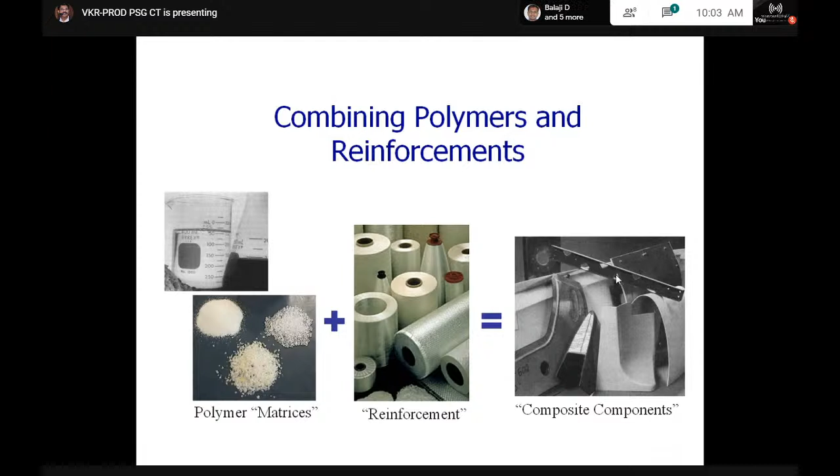To give an introduction about composites: it is combining polymers and reinforcements in a proper way to produce components for our use. There are many composites. If you look at them, composites are classified into polymer matrix composites, metal matrix composites, and ceramic matrix composites. Under polymer matrix composites, we have a lot of applications, ranging from aircraft components to wind turbine blades, fiber glass boats, and even automobiles.

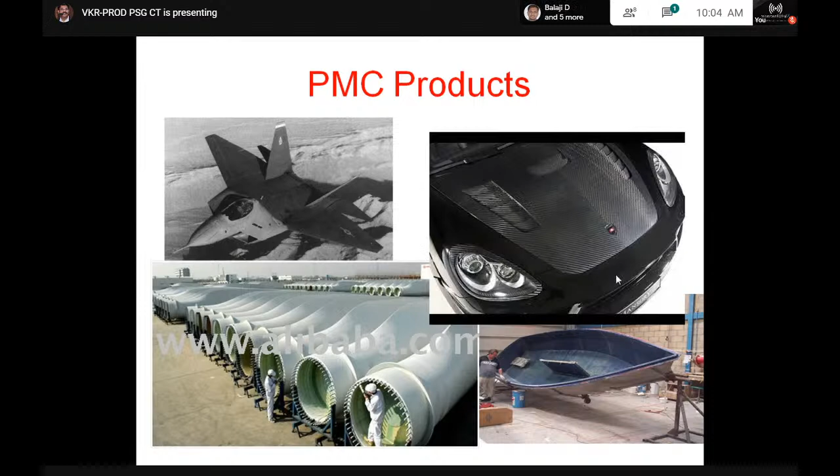Processing of composites is another important aspect to know. One popular process for making composites is the vacuum assisted infusion process, where the fibers are placed on the mold and resin is made to impregnate. Once it impregnates the fiber, we can go for either natural curing or autoclave curing. Most components required for aerospace applications are produced by autoclave curing. This is an autoclave, where the component, once infused, is placed and cured under a controlled atmosphere at high temperature and pressure. Of course, it is expensive.

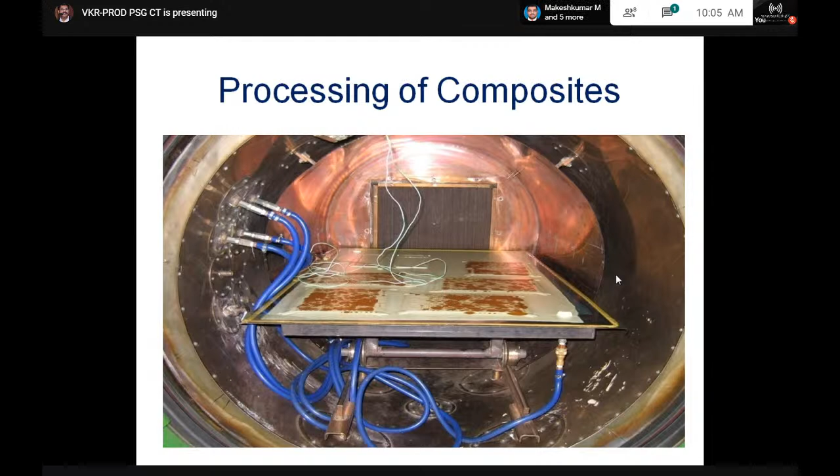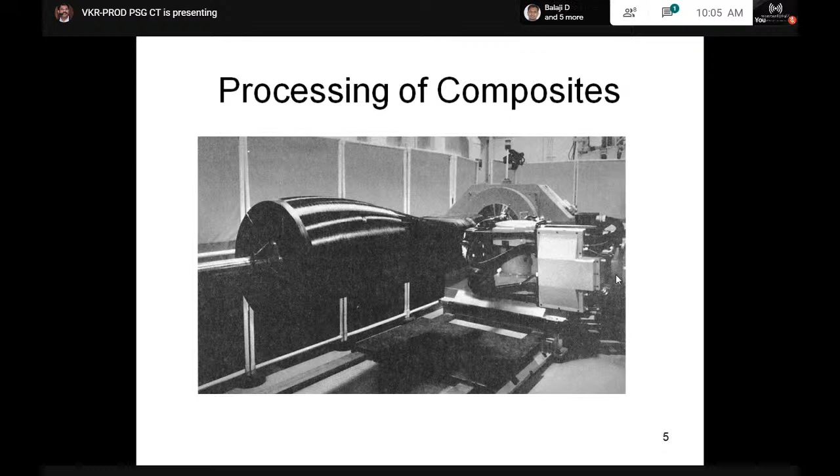You have other processes like filament winding, mainly for rotational parts. You can make tanks, you can make cylinders, where the fiber is made to pass through the resin and you can wind it on a mandrel. Let me show you a glimpse of a video of how cylindrical parts are produced.

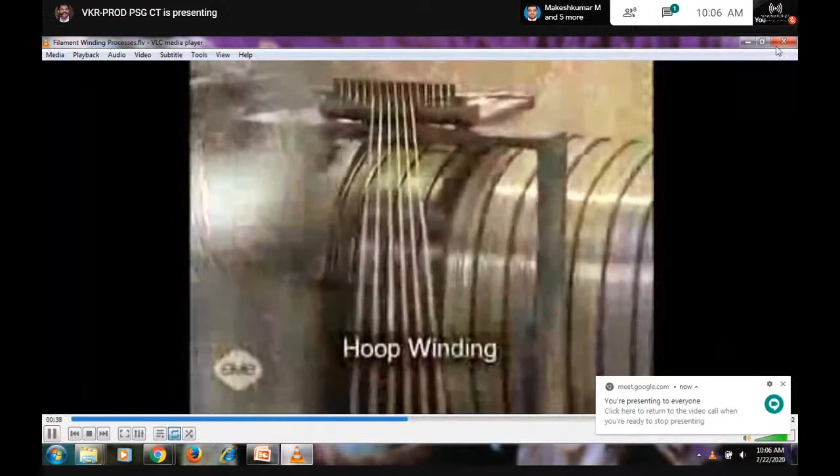This is one of the popular processes for making cylindrical parts. You also have another process generally called spray molding, where the fiber and resin are impregnated by spraying onto the mold. This is another process popularly used for making automotive components. The spray process gives you an idea of how difficult it is.

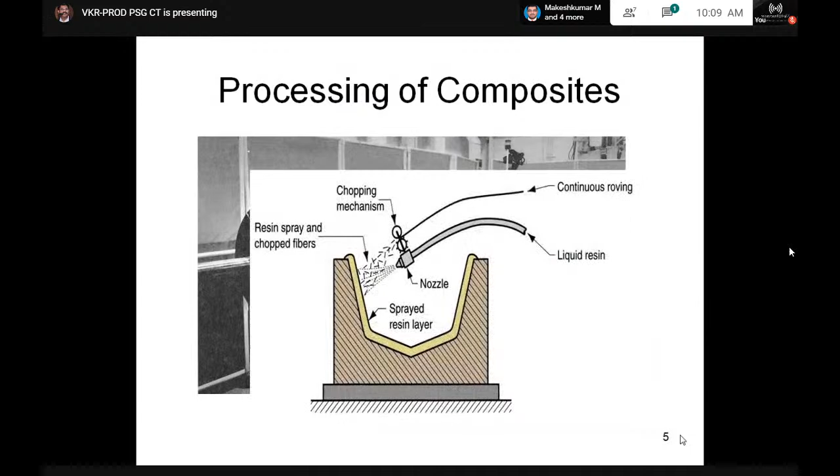If you look at the background and motivation for using composite materials in automobiles, one is auto emission—norms are becoming stringent. The second requirement is fuel economy; it's always good to have better fuel economy in your car. Several solutions exist: one is alternate fuel vehicles, but these are expensive. Improved emission control is another, and reduction in vehicle use—that's what we are practicing now, not traveling, though that may not always be possible. The last option is going for vehicle weight reduction.

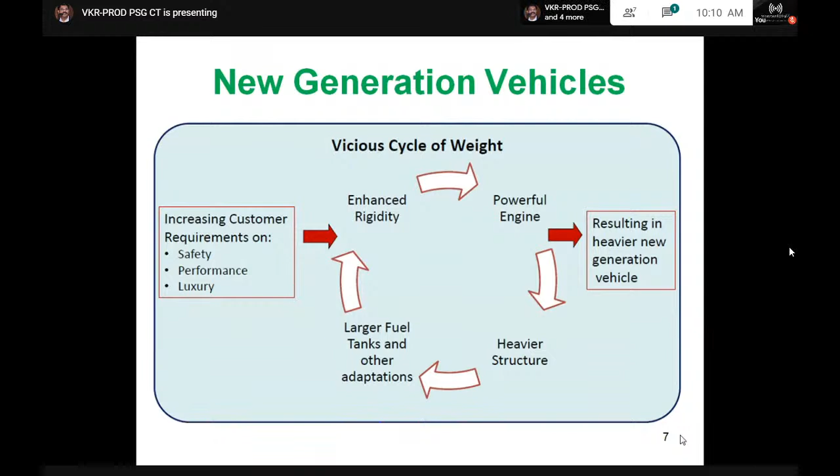If you look at a new generation vehicle, on the left you see increasing customer requirements, mainly on safety, performance, and third, luxury. When you look for safety and performance, you need enhanced rigidity, and everybody requires a powerful engine for performance, which leads to a heavier structure. A heavier structure needs larger fuel tanks and higher fuel capacity, resulting in a heavier new generation vehicle overall. Luxury also adds weight to the vehicle. The need for lightweighting is the order of the day because we always look for enhanced fuel economy. The other important aspect is the environment.

Enhanced payload carrying capacity will be another important aspect to be addressed. You can see a bus in the peak hour, which is designed to carry 50, will sometimes try to accommodate 100. That is a situation in our country.

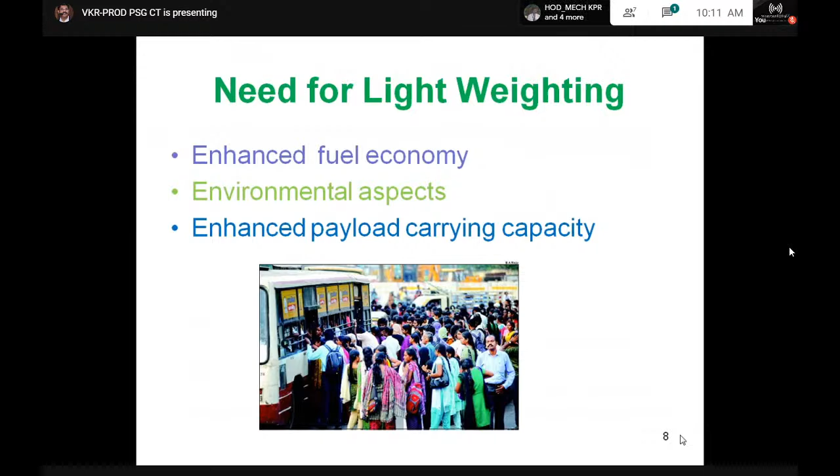If you see the opportunities in lightweighting, one is the lightweight material, and that is the major option. Structural lightweight construction is another option, and the last one is optimizing the production process.

Under lightweight materials, one option may be high strength steels, but they are quite expensive, mostly used in defense and aerospace settings. Aluminum and magnesium is an obvious choice. Then another welcoming member is unreinforced and reinforced plastics.

If you see the optimizing of production processes, we look for light joining techniques and new manufacturing processes.

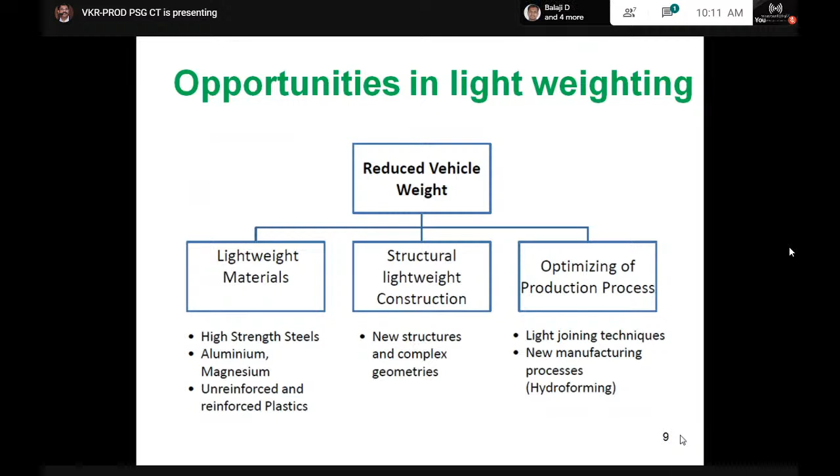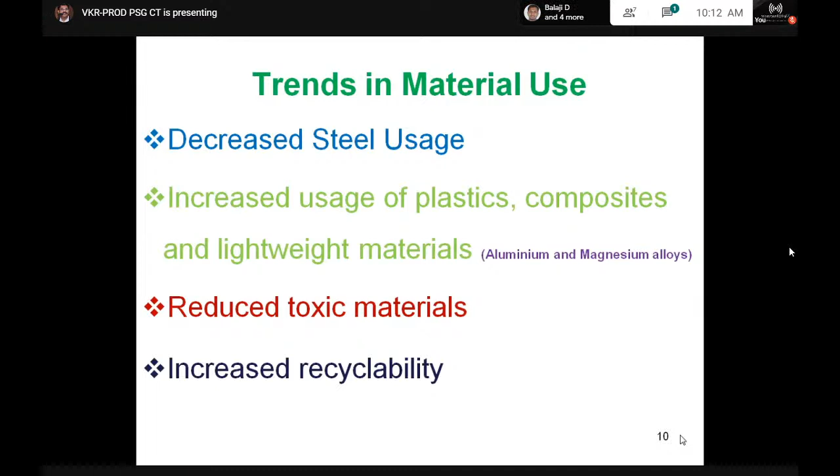The trends in material use are, as I already said, decreased steel usage and increased usage of plastics, composites, and lightweight materials. Aluminum and magnesium alloys are becoming the most preferable choice, and reduced toxic materials, which nobody is accepting. Another important aspect to look at here is increased recyclability.

So people normally look for composite materials, and the trends in composite materials are towards improvement in properties of the fiber. Enhanced properties of the fiber are always the requirement of the industry, whether it is the automotive industry, aerospace industry, or a different segment.

The properties of the resin are always improved. People develop resins for various applications. People look for degradable resin. People also look for resin which can withstand very high temperature, faster and predictable infusion, reduction in number of part counts. You don't need to make a lot of parts and assemble it, and cost reduction in various composites.

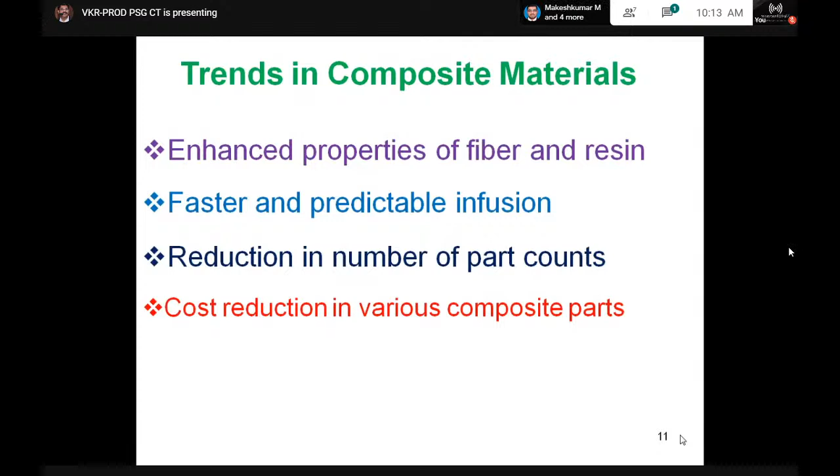With all the trends, if you look at composite materials, especially enhanced properties of fiber and resin, the key driver is weight saving, due to increase in specific strength and stiffness. Of course, performance and safety is another major requirement as far as the automotive industry is concerned.

I don't say it for general application, say a race car. You can see on the left, it is a complete monocoque structure made of carbon fiber, and it is actually joined to a metal chassis. This is actually a project done by one of my students in Western University, and he shared this.

When it looks to safety, you cannot take it lightly. The life of the race car driver is, of course, the life of everybody is important, but it's very, very valuable. You can see the environment in which the race cars are driven, or the speed at which the race cars are driven.

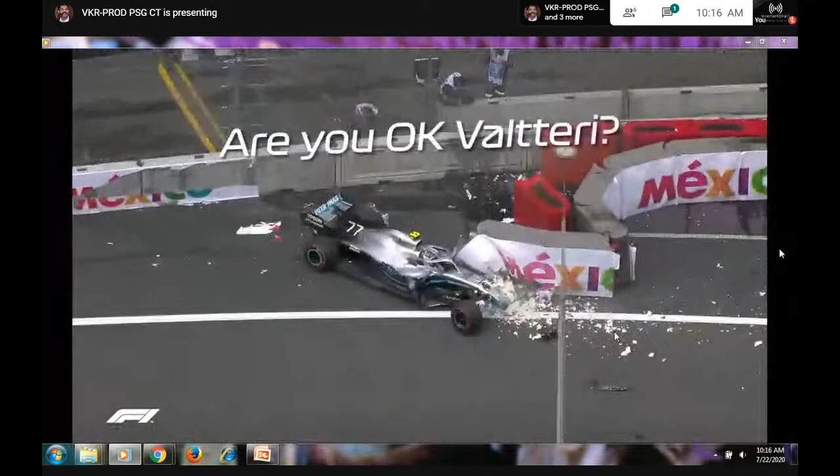You can understand the demanding requirement of a race car. One is performance. Obviously for a race car, performance is key. But more than that, safety plays a major role.

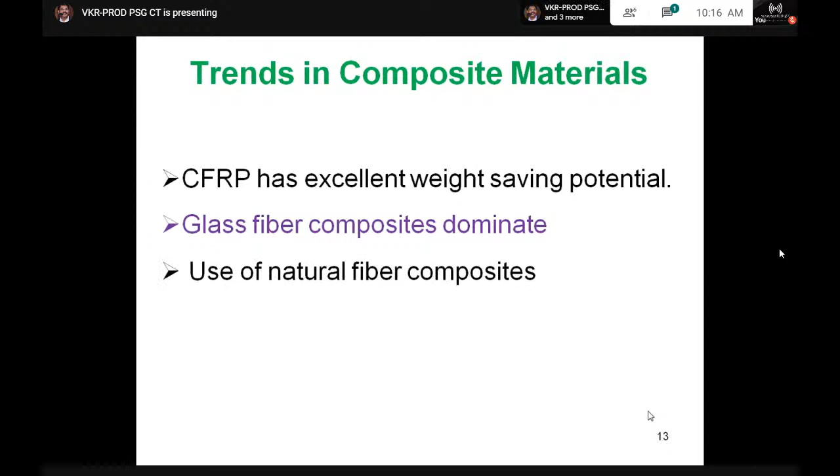CFRP has excellent weight saving potential. Most of the race cars are built by CFRP. Of course, glass fiber composites dominate in the automotive industries too. Another trend is use of natural fiber composites. We have a lot of scope in that.

Issues in composite materials: little has been done to reduce the composite systems cost because it was predominantly with the aerospace industry till now. Scrap rates of manufacturing processes are high. You cannot say that all the parts that are produced will be acceptable. The percentage of acceptance is less.

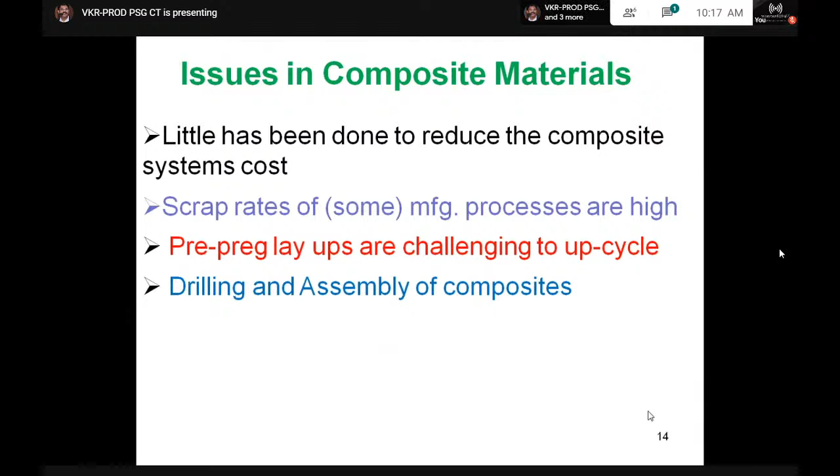And another important aspect is upcycling. Pre-preg layups are really challenging, time consuming, and drilling and assembly of products is also difficult. Once the product is made, you have to assemble it to either a metal frame, chassis, or structure. When you go for drilling a composite material, it normally leads to delamination, fiber fraying, and spalling. That too, when you actually drill along with aluminum or light metal, the chips that pass through the composite material still spoil the product.

So joining is a major issue as far as composite materials are concerned. We have done a lot of work in this drilling, and drilling of metal and composites. The alternate solution, not replacing the composite material, but an alternate solution to reduce the use of synthetic composite...

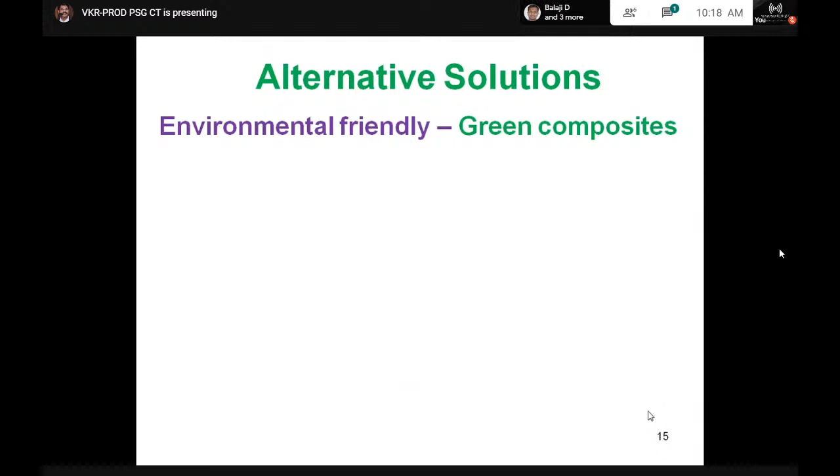...is going for green composite. So environmentally friendly green composite is one of the alternate solutions we can look into. Natural fibers and thermoplastic composites are the better choice, we believe, because thermoplastic composites can be recycled. Natural fibers obviously utilize natural resources.

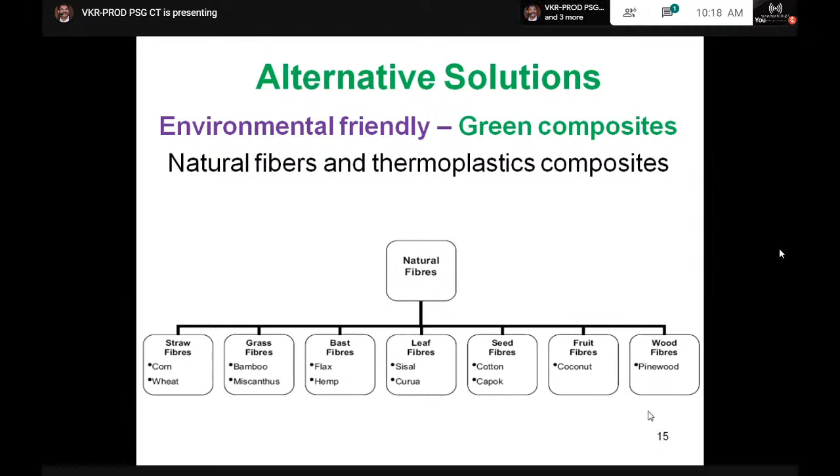We have many natural fibers, starting from straw fibers. You can see corn and wheat, grass fibers like bamboo, etc. Bast fibers like flax and hemp, leaf fibers such as curua, then seed fibers, fruit fibers, and you also have wood fibers.

Low cost too. One important aspect I want to tell you here is in our engineering environment, the availability of high performance fibers is really scarce and expensive. We don't get fibers, especially high performance fibers, in our country.

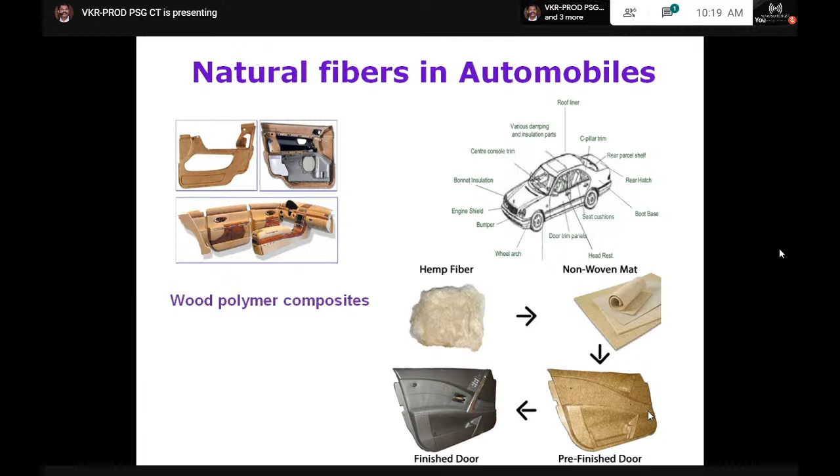You can see the various options that are possible in an automobile, from the roof interior to bumpers, hood, wheel arch, etc. Even boot base, etc.

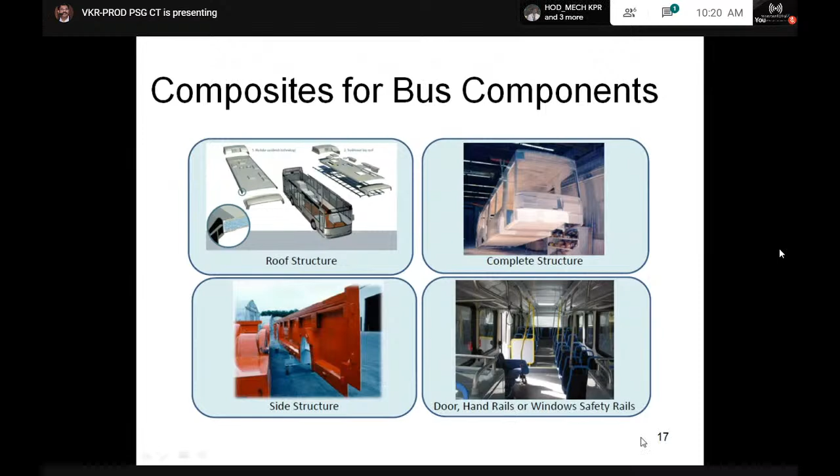You can also use it for bus components, composite for bus components. So you have the possibility to use it in the roof. You have roof structures, then side structures that are possible. Then you have a complete monocoque structure which you can able to produce, which reduces the number of parts assembling into the structure. And you can even use door handrails or window safety rails.

We have actually taken up some work in this direction. We have done composite sandwich. The core material is a low strength material, but its higher thickness normally provides higher bending strength and stiffness with overall low density. A lot of sandwich materials are available in the industry.

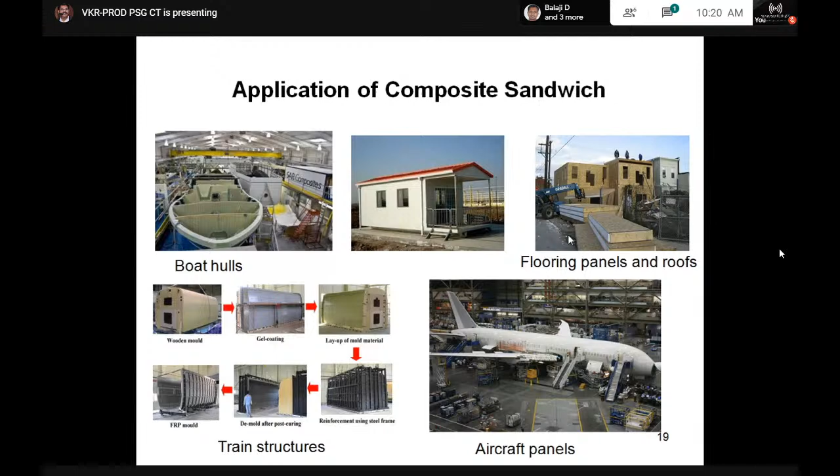You can see the application of composite sandwich where boat hulls can be made, flooring panels and roofs for housing applications, and of course train structures. It is also used in aircraft panels. You can see some of the flooring and roofing panels made in India successfully.

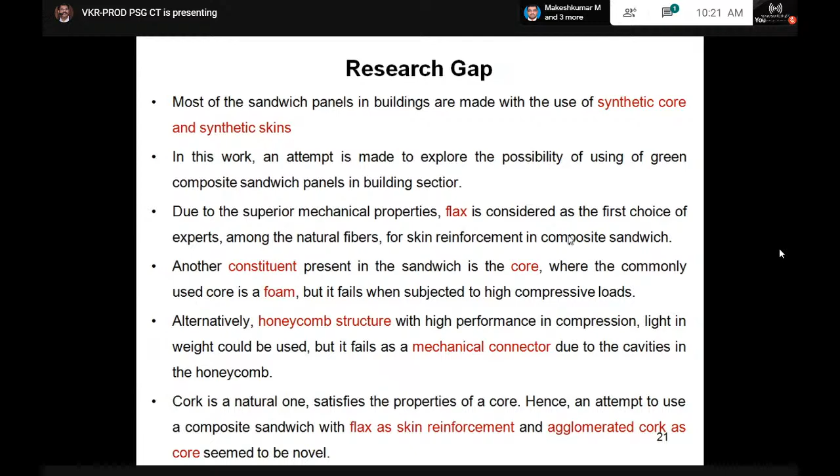So we took this as a research topic, and instead of going for a synthetic core and synthetic skin, we tried to use flax, a natural material, and instead of going for a honeycomb structure or foam, we used agglomerated cork as a core material. Of course, you can see the flax fibers that are produced in the stems of the flax plant. The structure is more crystalline.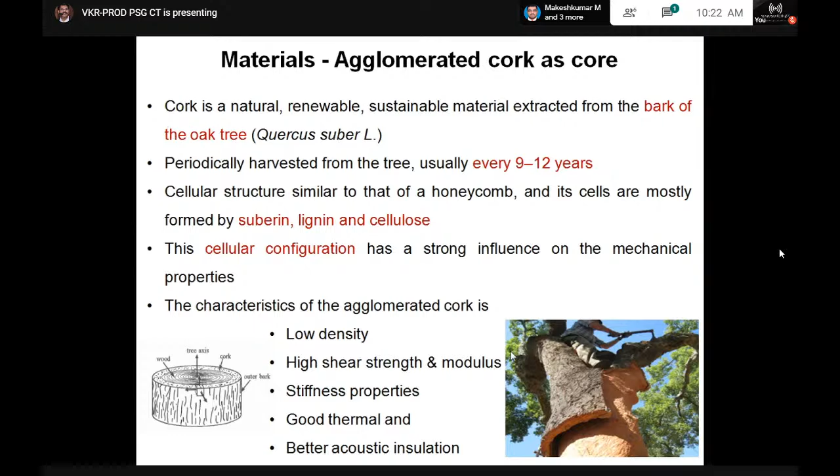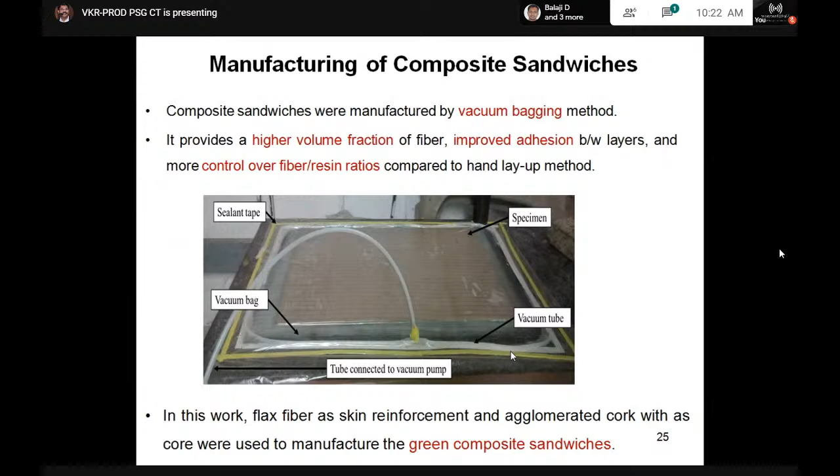And we took cork as core. This is another natural material available for us to use, which has low density, high shear strength and modulus, better stiffness properties, good thermal and better acoustic insulation. So more or less we used natural material except a small amount of resin which is used for binding the skin to the core. Of course, we produced this using a vacuum bagging technique, and this was cured at room temperature. We didn't go for oven curing.

There is an option we can think about. We can go for oven curing instead of autoclave curing. Autoclave is expensive, but of course oven can be a cheap solution.

We made a lot of specimens, mainly for characterizing the sandwich panels, and we found that the flexural strength is much better than its counterpart, maybe the material which we try to replace, like plywood or gypsum board or glass reinforced gypsum. So we got better strength.

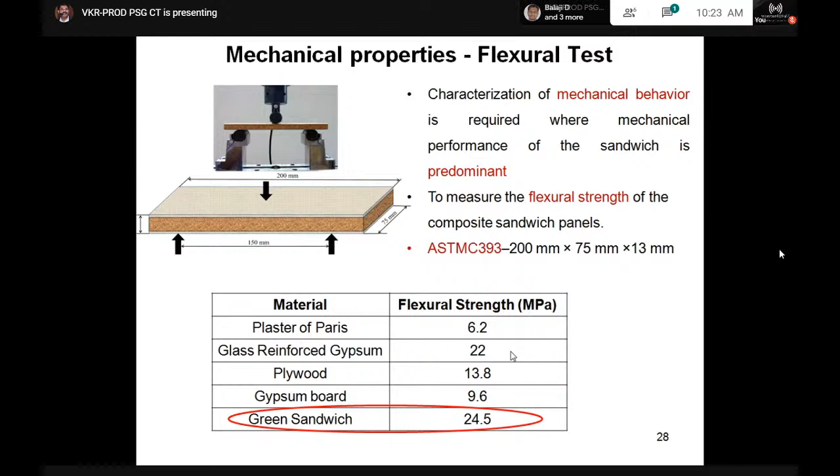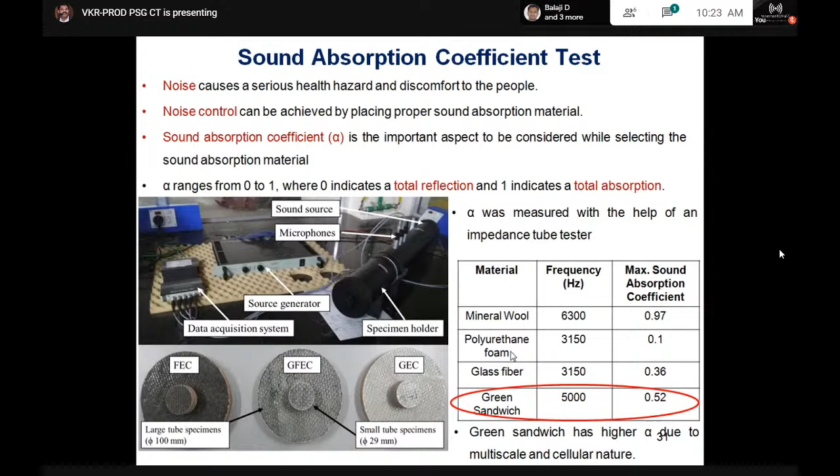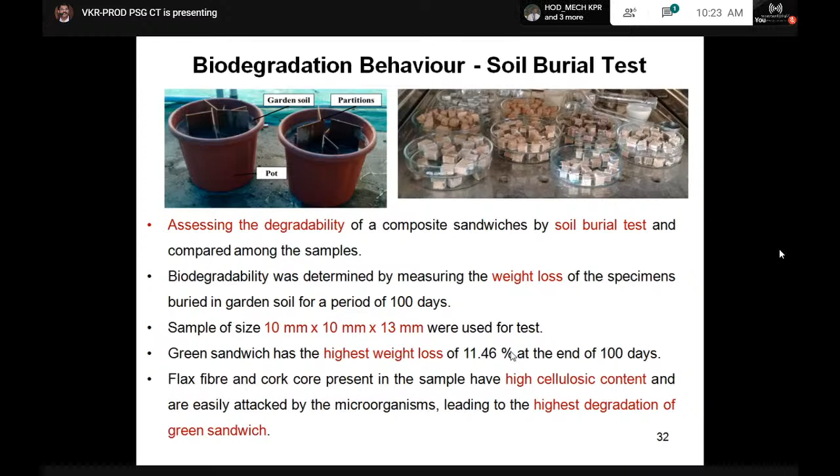Of course, we have done a lot of other tests like impact studies and compression behavior, etc. But more importantly, since we are talking about automobile application, we need to look at how it actually gets disposed of, right? Since we use a lot of parts, biodegradation is very important. And we could able to find almost very good results, and they showed 82% higher biodegradation than synthetic sandwich. So this is one of the advantages if you try to use natural fiber and natural material as a whole.

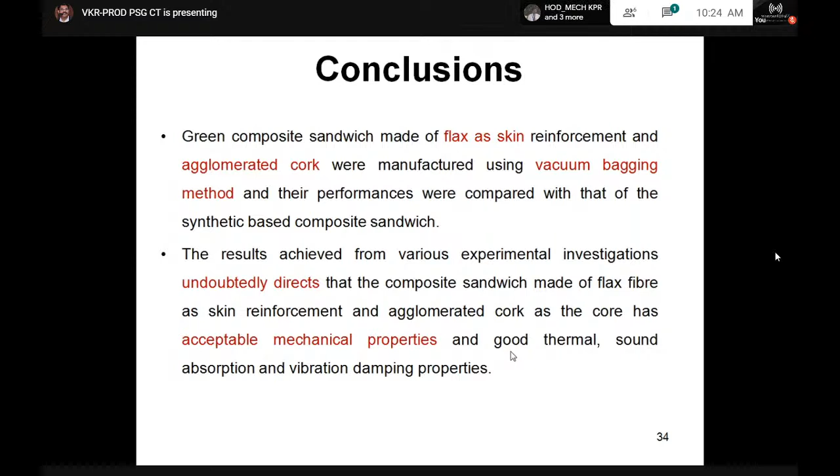So when you look at a product as a whole, what we need to look at is the performance and its weight. This is generally attached to the technical aspect. We also have to look at the market - so volume and price - obviously looking for better profitability and return on investment.

So the technical challenges, especially as composite materials are concerned, start with the manufacturing process. Many manufacturing processes are available, but few are only suitable for mass production. The issue is cure cycles are longer.

Another challenge is composite manufacturing process automation. If you look at the automotive industry, automation becomes a major issue - you need components in mass, and they should be produced in mass. You would have seen in spray molding how many people are working; it requires skill, a lot of labor, and you need to wait for a longer period of time.

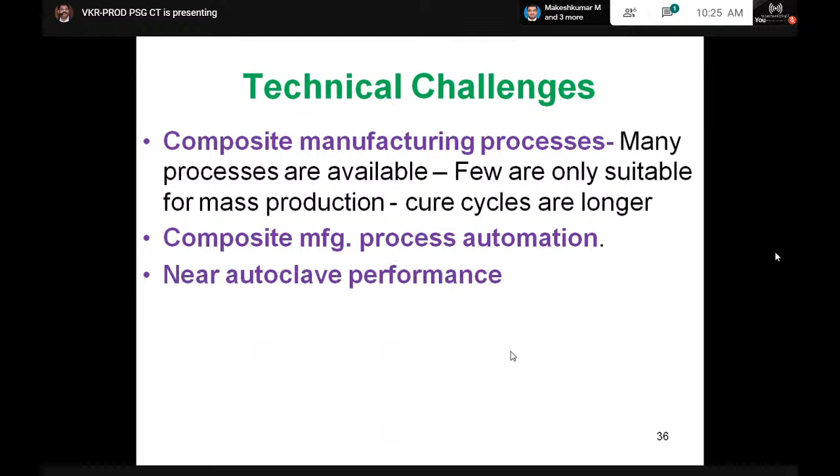The third important challenge is near autoclave performance. The performance of the component should match with the autoclave cured product.

Cost of materials - yes, carbon fiber manufacturing is not really available in our country, so we import to a larger extent, and that adds to the product cost. If you try to use it for automotive applications, you obviously look for low cost solutions. Right now, GFRPs are widely used, but natural fiber composites may find more applications in future.

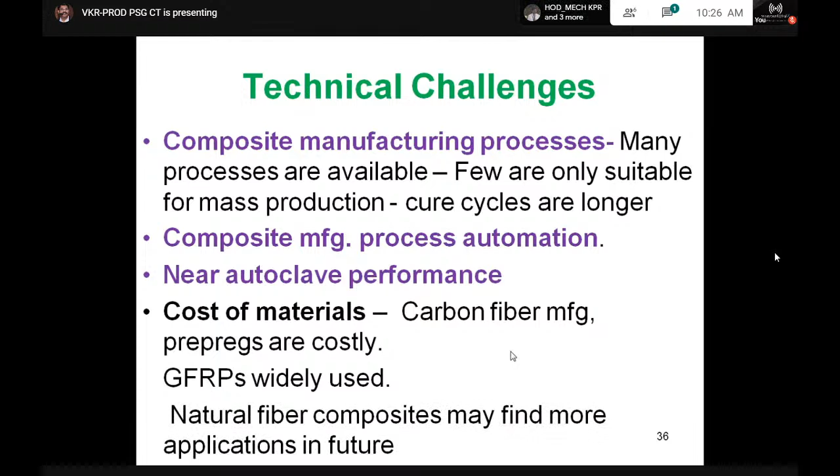Other technical challenges in composite manufacturing, especially on the automotive side, include methods of determining damage - whether the product is really suitable for application. So damage detection and assessment is another crucial aspect.

Repair techniques are also limited. If the part is damaged, how do you repair it? Replacing the entire part leads to increased cost, and on the other side, there's the question of how to dispose of it.

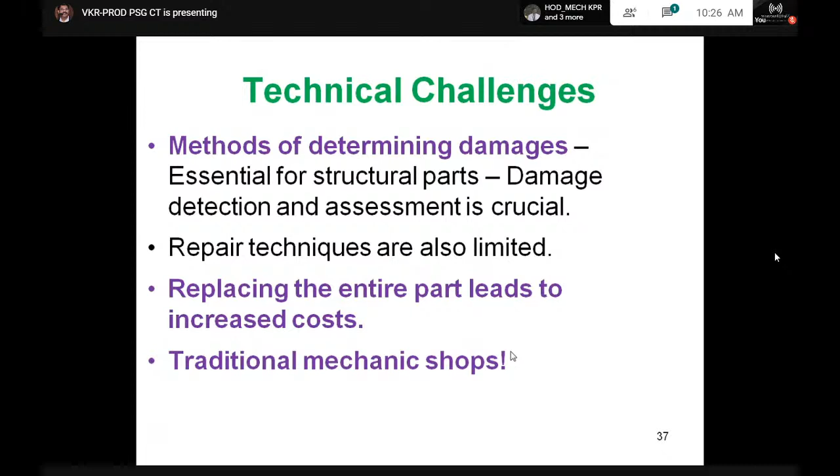And how to train the traditional mechanic shops. If there is a small issue in the vehicle, we normally go to a mechanic shop and it gets handled without much issue. But when you use composite parts, the mechanics need to be trained.

More importantly, joining techniques, because we are using composites in conjunction with existing metal parts. This results in multi-material car bodies that need to be joined by a stable process. One solution may be adhesive bonding - cost-effective and faster - but bonding adhesives are required, so we need to establish a proper procedure for joining.

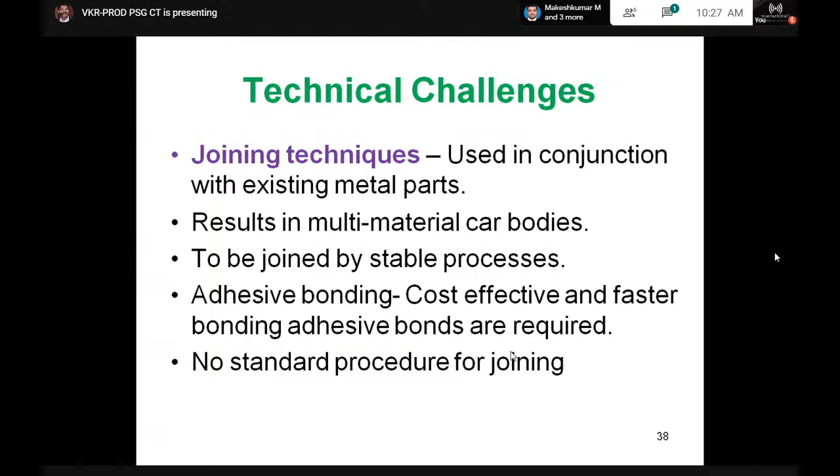The recycling process is not as straightforward as with metallic materials. With metal, you can just scrap it and somebody can buy and recycle it. But here, most of the time it is assembled by metal fixing, so you have to break it apart - disassembly, debonding, and separating are major issues. Cost of recycling is another technical challenge we need to look into.

What you see here are applications of types of composites based on fiber. On your left, glass fiber composites: interior, headliner, underbody system, air intake, manifold, instrument panel, bumpers, beam. A lot of parts are presently made by glass fiber composites.

Carbon fiber composites, of course, are used for chassis, monocoque chassis, roof, tailgate, hood, door panels, side panels, rear spoilers, fenders, and bumpers.

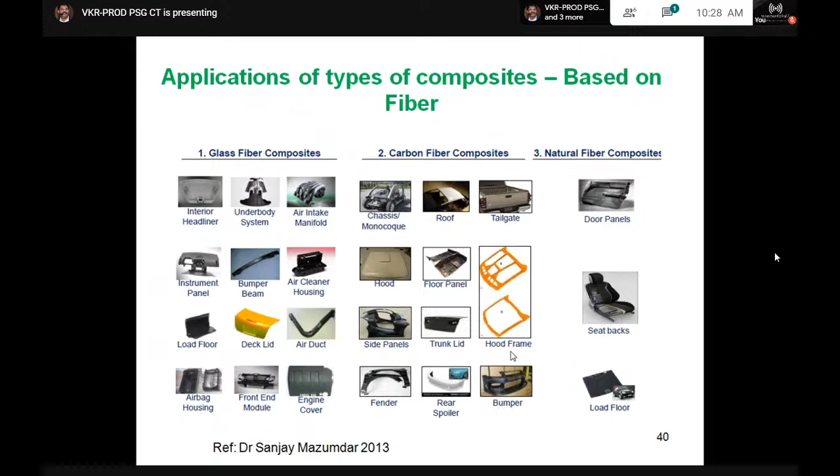But natural fiber composites are mostly used for interior door panels, seat backs, and load floors, and we have a lot of scope for utilizing natural fibers in automotive applications.

So this is my overview about composites for automotive applications.

If you look at composites for armor applications, I have a small presentation which I would like to share, prepared by the Australian Defense Force Academy, where I had an opportunity to visit. High velocity impact behavior of ultra high molecular weight polyethylene fabric reinforced composite laminates. This is actually one kind of high velocity gas gun which is able to throw a steel ball at 3,000 meters per second.

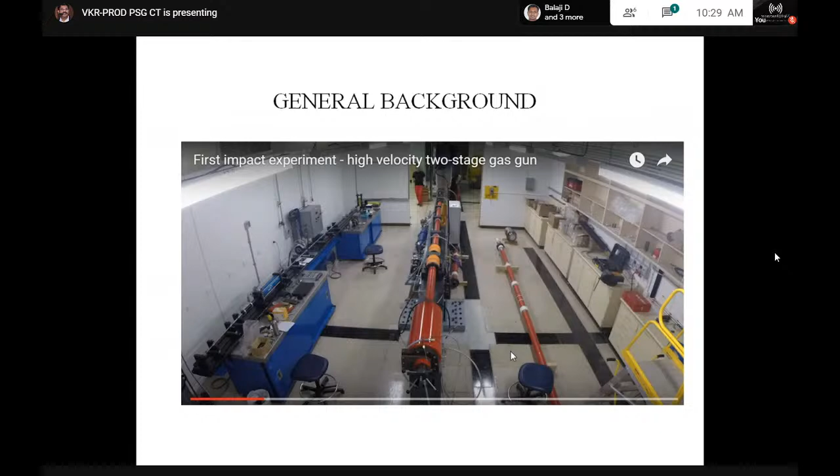So this is one of the materials that was available in the ADFA Australia. The background is the newly developed ultra high molecular weight polyethylene fibers, and it is sold in the market under the brand names Dyneema and Spectra.

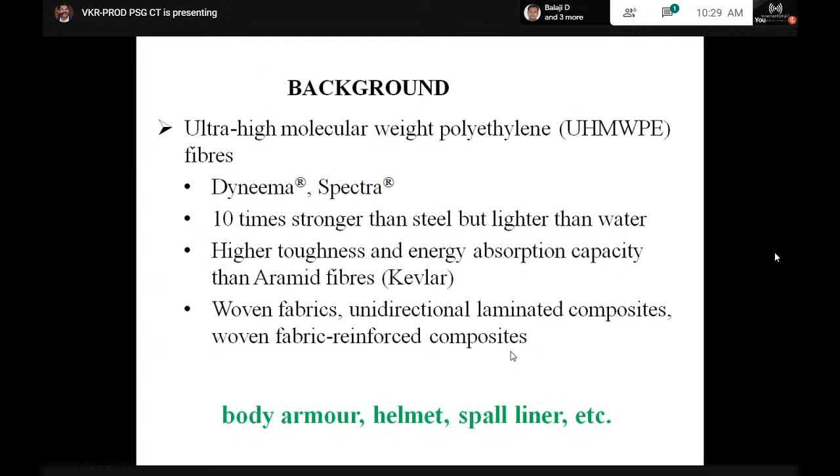The objective was to study the impact performance of laminates reinforced with Spectra and Dyneema fibers, and to assess the role of thickness and fabric architecture compared with different matrices, ranging from brittle to highly flexible materials.

So they took two materials for testing: a plain weave made of Spectra, and a satin weave fabric made of Dyneema. Four resin systems were used: epoxy being brittle, so they also used nanoparticle toughened epoxies which are less brittle than epoxy, ductile epoxy, and polyurethane.

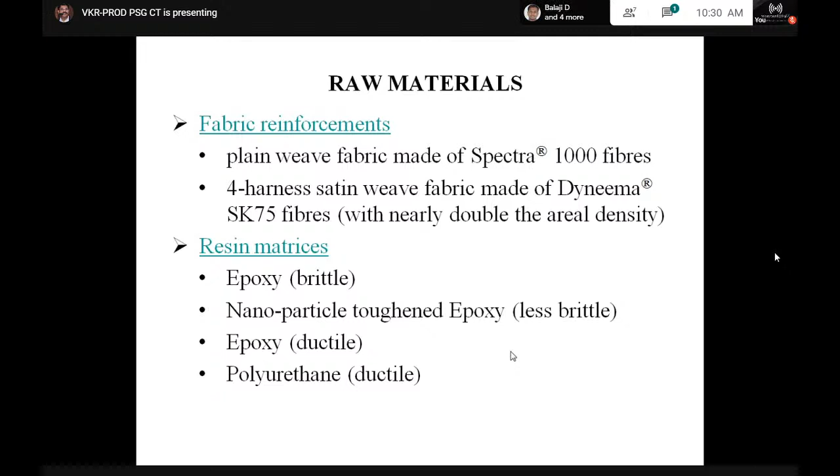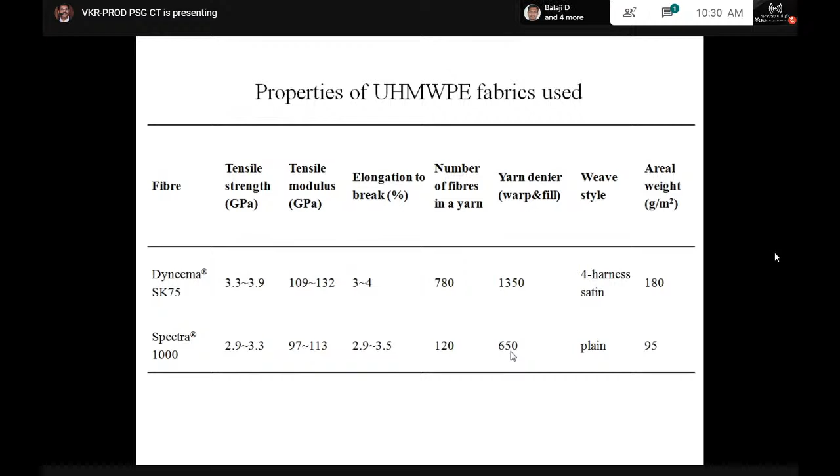This is the properties of ultra high molecular weight polyethylene fabrics, looking at Spectra and Dyneema. The tensile strength is 3.9 GPa for Dyneema, whereas Spectra is 2.9 to 3.3. Tensile modulus is 109 to 132 for Dyneema, whereas for Spectra it is 97 to 113. If you look at the specific strength and specific modulus, it is much higher than any other materials available for our use.

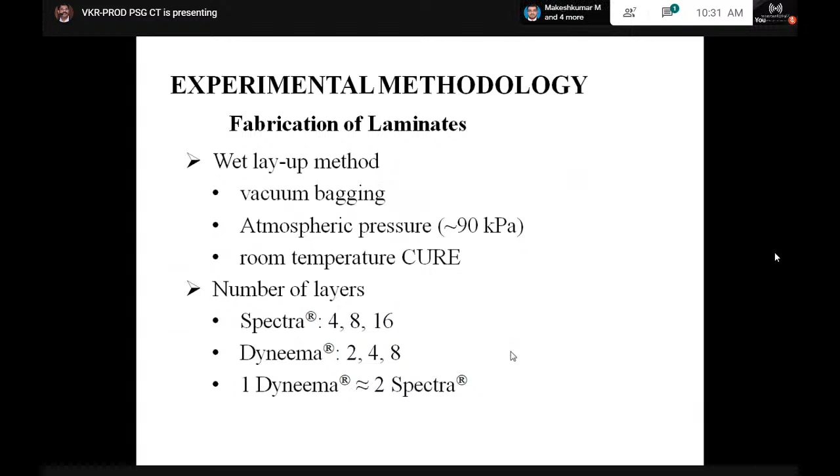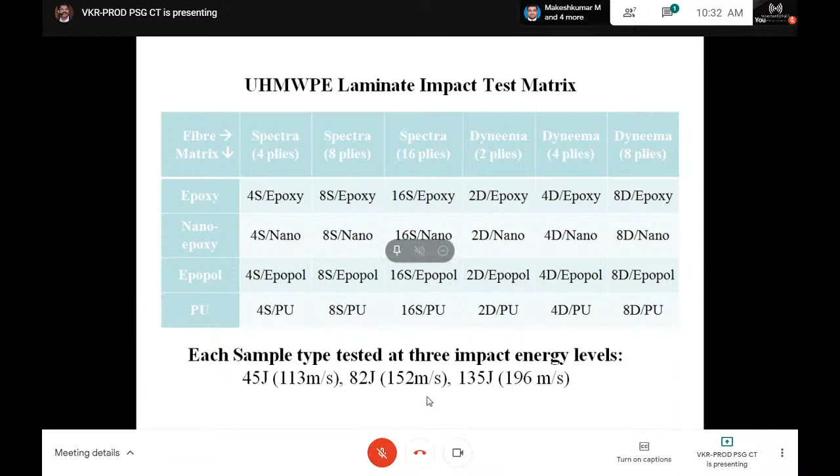This was done using a medium velocity impact testing setup, where a spherical ball of 12 mm diameter was used. The mass of the ball is 7.05 grams, and the gas pressure is available here, with impact energies from 45, 82, and 135 joules.

The target was clamped in a fixture, and high-speed photography was used, capable of taking 8,000 frames per second. This is the capacity of the camera used to capture the behavior of the composite when the spherical steel projectile hit at a particular velocity.

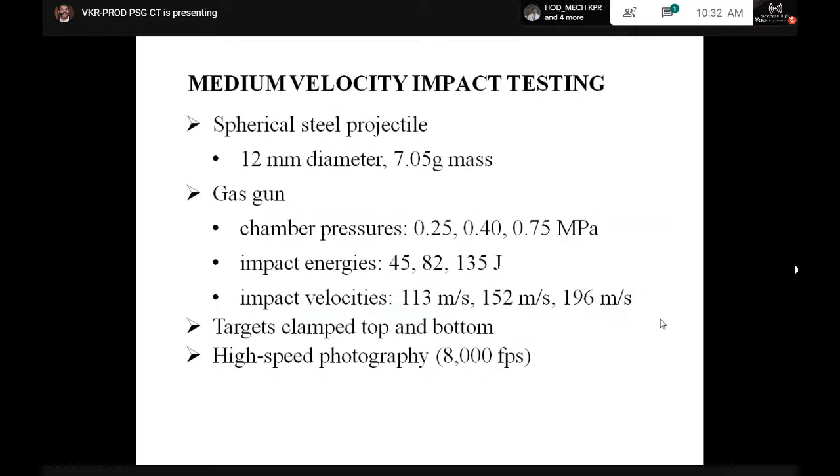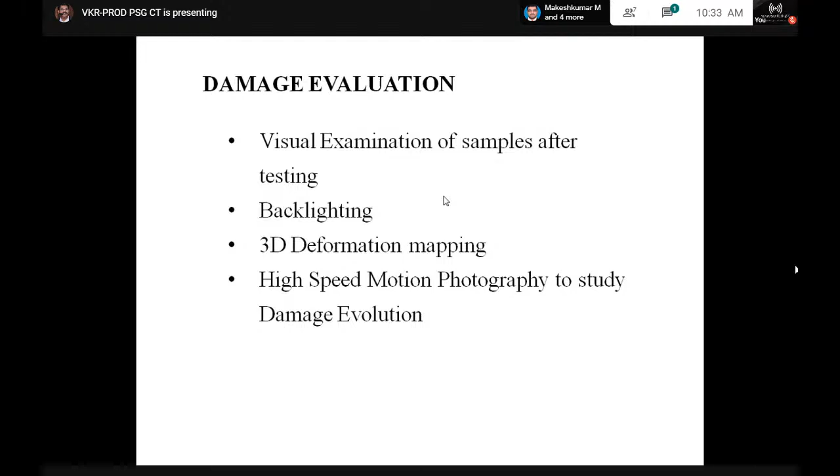The damage evaluation was done using visual examination, backlighting, and three-dimensional deformation mapping, also captured with high-speed motion photography. For backlighting, the specimen is placed above the projector and recorded using a camera. Laser scanning provides a 3D mapping of residual deformation using laser photography.

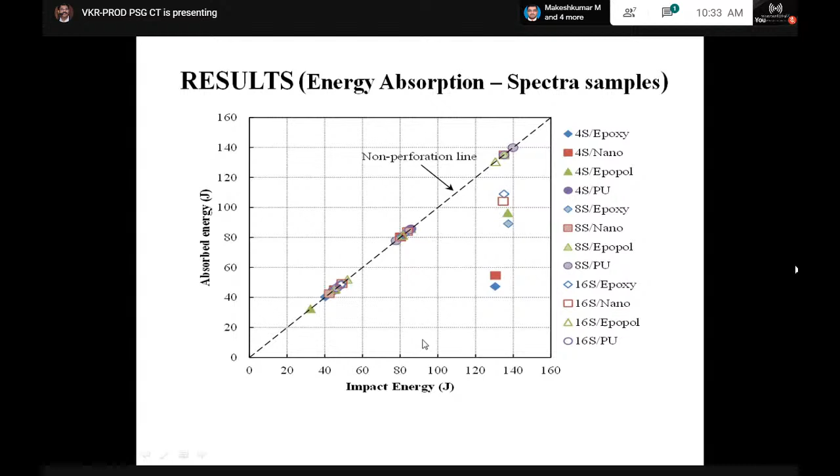So these are the results of the Spectra samples, showing absorbed energy versus impact energy, in comparison with Dyneema. Spectra performs much better than Dyneema.

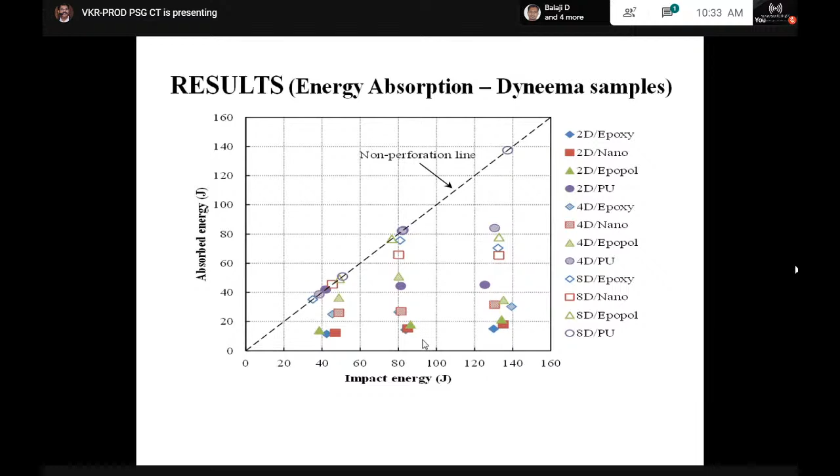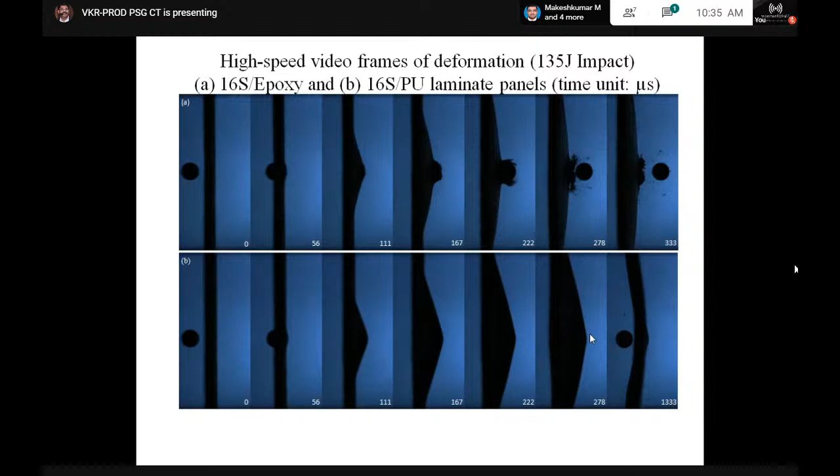But one issue you have to look at is this. That is what we call a back signature: the amount of deflection or bending the laminate is subjected to. Right? This particular material is normally used as personal protection. We call it a bulletproof vest. But behind this, there will be a light metal insert, which will not allow the laminate to deform. If it deforms a lot, the back signature is very high, and then it creates damage to the person who is going to use this personal protection device.

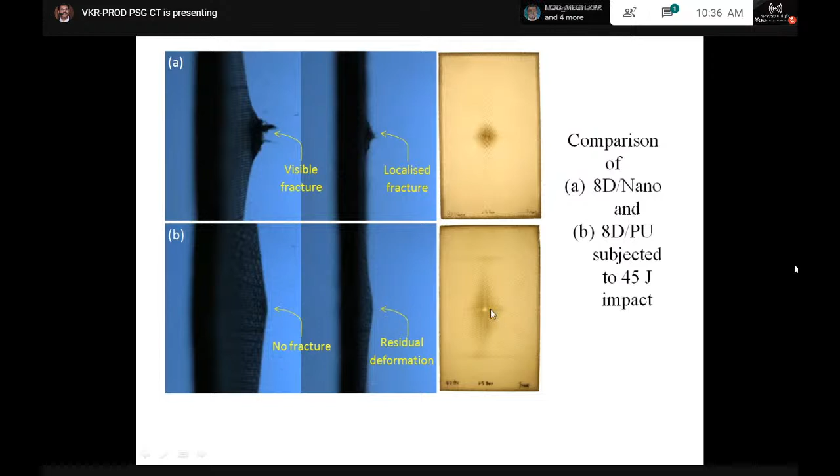So this is the comparison of 8D nano and 8D polyurethane subjected to 45 J impact, and the brittle laminate actually creates a localized fracture. Whereas here there is no fracture, but you have deformation, residual deformations, which you can see here. Right, so this is another result.

So the major conclusion was the impact response of ultra-high molecular weight polyethylene laminate is strongly dependent on its properties and thickness. As the thickness and matrix rigidity increase, the impact response gradually changes from membrane stretching mode to plate bending. Among the 4 resins studied, flexible matrices performed better. The laminate panels with flexible resins have higher penetration resistance and energy absorbing capacity. The Spectra laminates had higher perforation resistance and energy absorption capacity than the Dyneema counterparts, irrespective of the resin used.